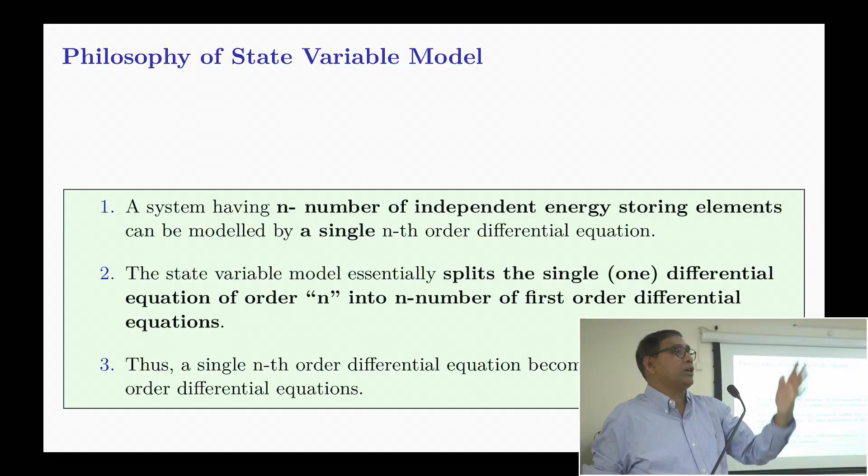A system having n number of independent energy storing elements can be modeled by a single nth order differential equation. So what the state variable model does, it does not use a single nth order differential equation, it splits it. The state variable model essentially represents the nth order system by n number of first order differential equations. So a single nth order differential equation becomes n number of first order differential equations. Now why is that?

Then it becomes easier to solve and do the analysis, because all the equations are first order.

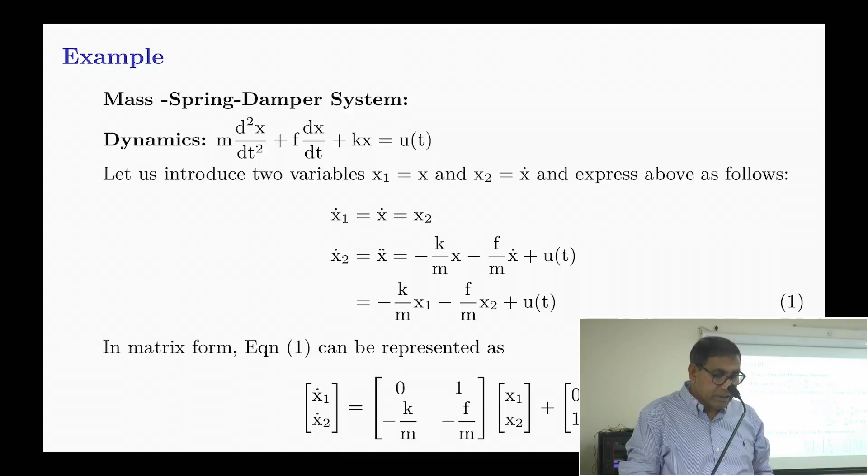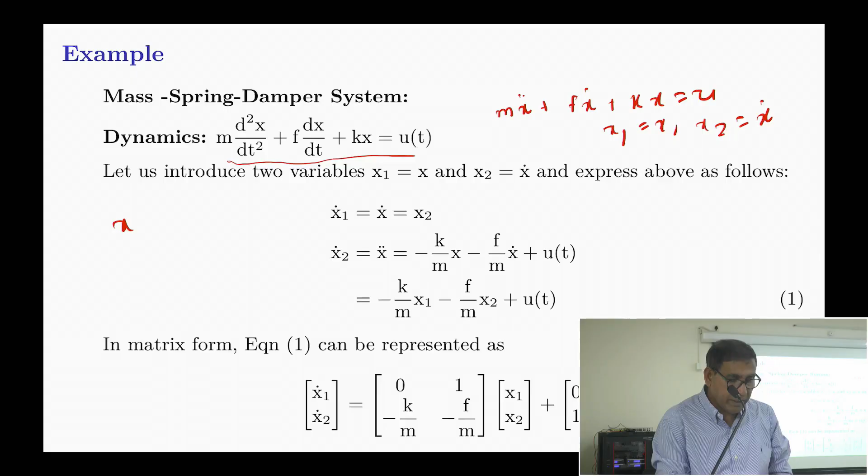Just one example to give you: suppose m x double dot plus f x dot plus k x is equal to u. So if I define x1 is equal to x and x2 is equal to x dot, then the first equation will be x1 dot is equal to x2. And x2 dot, I'm not entering into that because that is equal to x double dot. If you take it to the other side, you will find this is the case.

And this system is now represented by x dot is equal to Ax plus Bu, and y is equal to Cx. So instead of a single higher order differential equation, you can split it into only first order differential equations.

I assume that you know state space model. All the analysis and controller design which is made by this state space model is called modern control. X dot is equal to Ax plus Bu and y is equal to Cx plus Du. One is the dynamic equation, the other is the algebraic equation. Y is equal to Cx plus Du is the algebraic equation.

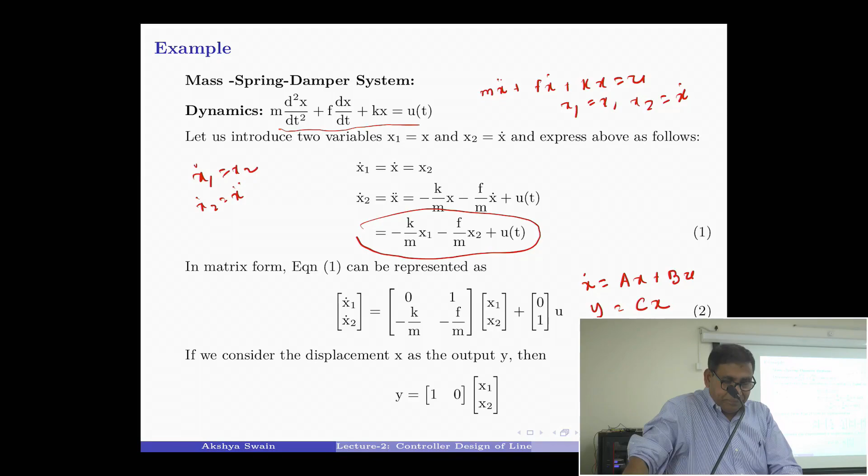This is the point, I will take a little more time. I will tell you, if we answer this question, our understanding about control engineering will be around 70% clear. Just this simple question: is it necessary to use a controller, to design a controller? People say we have to design a controller, right? Is it necessary? Is it a mathematical gymnastics that we will design a controller?

When we were doing PhD in England, in the postgraduate office, there were 2-3 pages of writings every week. Why should you do a PhD? Once it came up.

When I was doing PhD in 1994, one thing is, if you do a PhD, people will think you are intelligent, although you are a bloody idiot. You have no brain, but you are doing PhD. You know what is the meaning of PhD? I am telling you, it is recorded, that's fine. The people listening to live streaming will know it, that these are the foreign faculties telling these things.

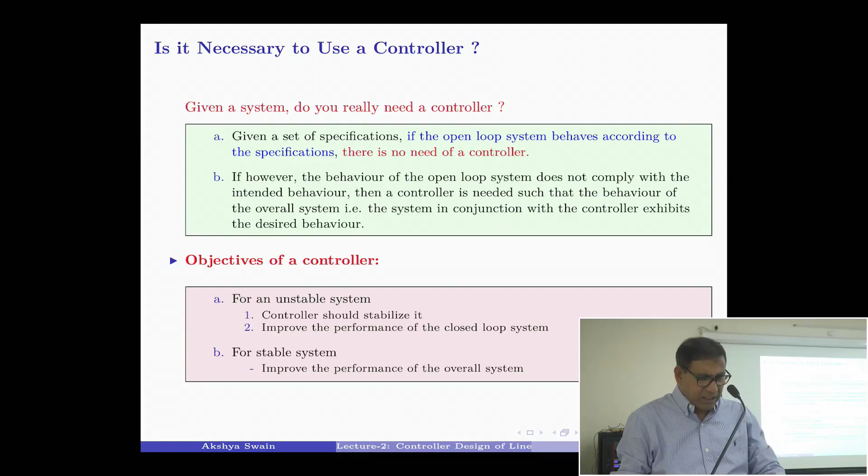We'll see those things written, forget that. This analogy which I am giving: suppose you have a teenage child, and he enters into what we call grammar school, meaning higher secondary school - class 9, 10, 11. Now suppose today your child enters into a grammar school, higher secondary school. The question is, will you employ a tutor from today?

You tell me, let us answer it very carefully. Understand the question first: you have a son or daughter, and she got or he got admitted into the school. Today, will you employ a tutor to come to your house and teach your child? Certainly not, you are not that fool. Clear? You are not that fool, because once a tutor comes to your house, you have to pay money.

Now consider the example of a student studying in grammar school, meaning the higher secondary school. Assume that the student has opted for the following courses: physics, chemistry, mathematics, and English.

Now what will you do? You will not employ a tutor. You will wait till the first term examination, school examination, is over. After 2 months, there will be a school test. Suppose he has taken these 4 subjects. Now assume this is the percentage: he has got physics 90%, chemistry 85%, mathematics 95%, English 70%.

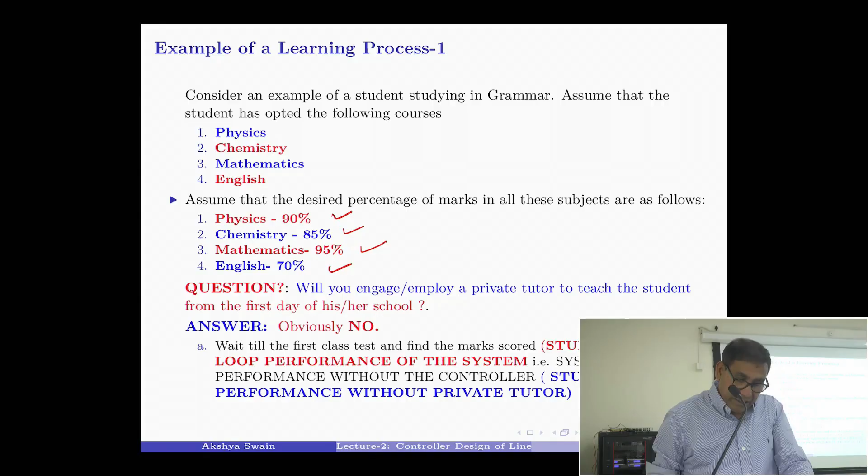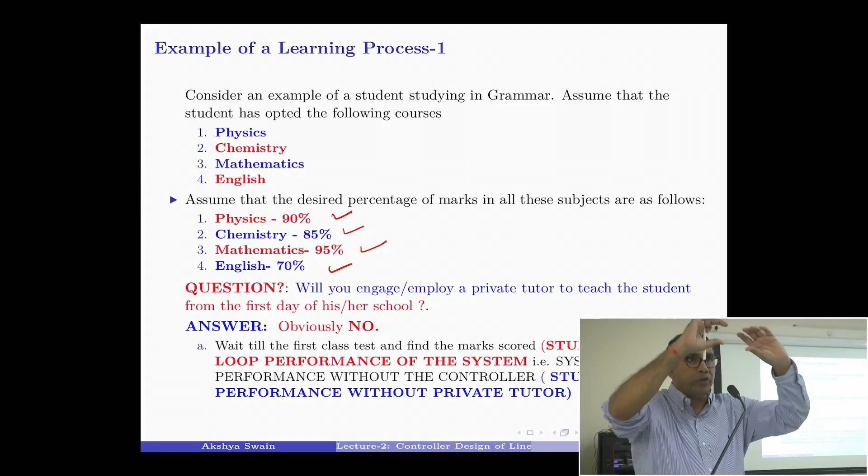Will you engage a private tutor? No, because they have almost the desired performance. Wait till the first test to study the open loop performance - that is, study the performance of the system without the controller. That is the open loop performance of the system, right? Student performance without a private tutor - you first do that. Now let us see, interesting things are coming up.

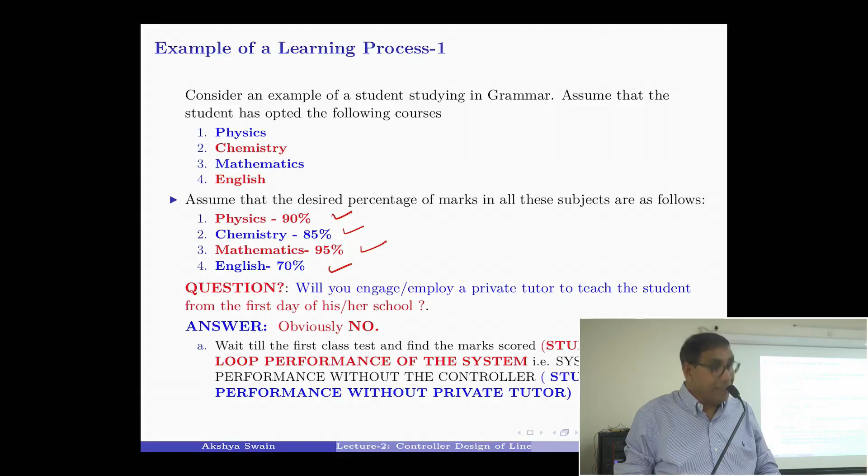Now suppose after the first test, this is the performance - the open loop performance of the students, the marks obtained without a tutor. Tutor is the controller, we'll see. After the first test, the marks are as follows: physics 87%, chemistry 78%, mathematics 94%, English 10%. What will you do? There is no other way out. You have to employ a private tutor, yes or no? You have to employ a tutor. Controller is a must, right?

Then again the problem comes. So I need a tutor, otherwise you will not get your dinner at home, your wife will beat you - what the hell are you doing, your child is scoring 10% and you are thinking he will become a Shakespeare? Now 10% in English, horrible performance, there is no other way out. What should I do? I have to employ a private tutor, right? Should I go outside this NIT campus and stand on the road holding my hand up saying my son has got 10% in English? Will anybody be interested to come and teach my son? Should I do that?

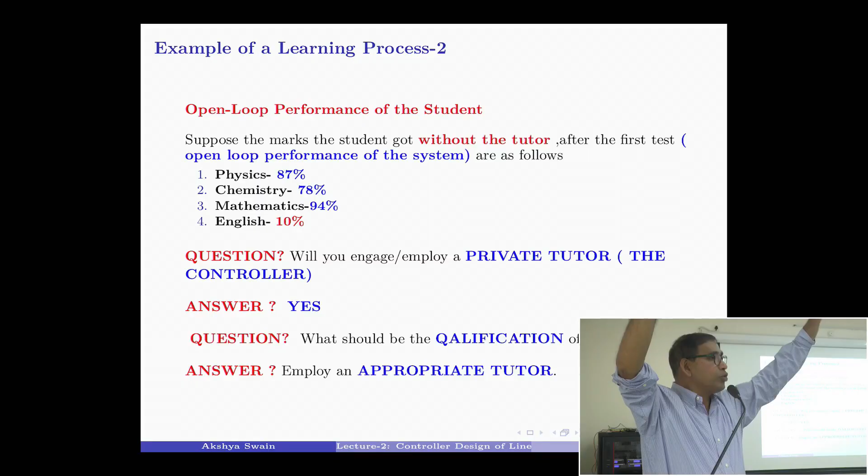If I do like this, many people driving by will stop there - okay, I am unemployed, I will come to your house, because they will get money. Yes or no, should I do it? Should I go to the Panjim railway station and ask - so many people are coming out of the train, my son is doing 10% in English, is anybody coming? Should I do that? So what must I employ? An appropriate tutor.

Appropriate, not any controller. There are many types of controllers.

Who is the appropriate tutor here? Either an English graduate, or if I am in academics, I will go to the English department, Faculty of Humanities. I will talk to the English HOD and ask, do you have any PhD students who are interested to teach? So he will say, okay, I have a couple of PhD students, I will ask them.

So you get an appropriate tutor, right? Those people who have got knowledge of English, that is called the appropriate controller. Employ an appropriate tutor, in this case, an English graduate at least, minimum English graduate.

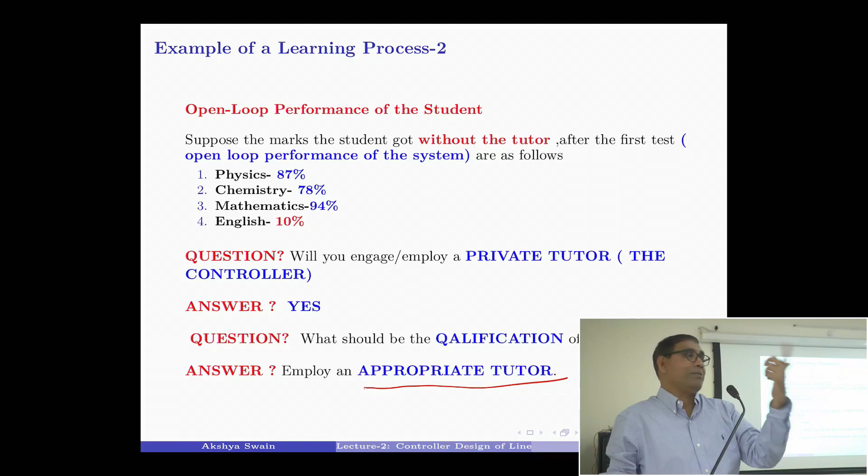Everything is fine, right? Now the next question is a very interesting question. Second test comes. First test is the performance, by second test there is a tutor coming to your house, teaching there, right?

Suppose we engage an appropriate tutor to teach the student. Are we sure that the performance of the student will improve in the next test? That is the important point. Can you guarantee?

Can you guarantee that the performance of the student, your child, will improve? Everything is perfect now. Tutor is perfect, very nice person, English graduate, even an English gold medalist coming to teach.

I will tell you, this is the universal truth. What is the universal truth? There is some universal truth. Universal gate, NAND gate, NOR gate. Correct me, Professor Vida Kumar, I have no knowledge of electronics now. NAND gate, NOR gate, right? Universal truth. There is another universal truth.

All the married people know it. Two people in the entire cosmos, if there is multiple universe according to string theory, that is truth. Two people in the entire cosmos always think that you are not useless, you are bloody useless. Who are they? One is your wife, another is your child.

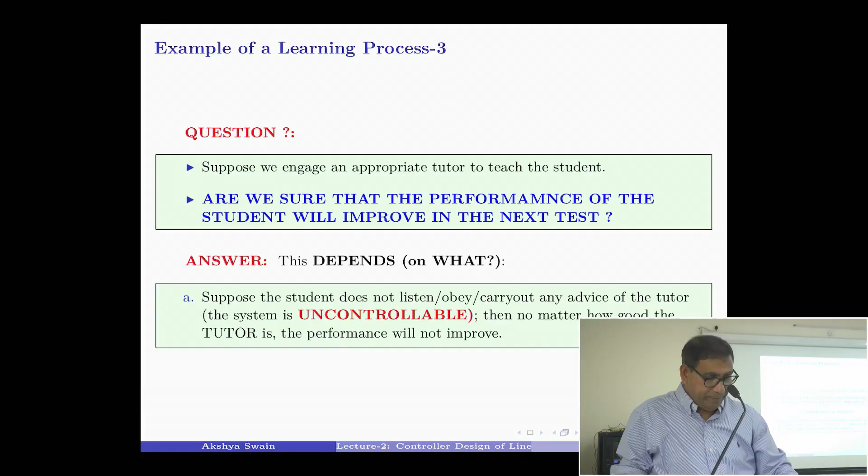Clear? So don't design the controller just because you are intelligent. It is not an intellectual gymnastics. There are so many steps. More complications are coming, just wait. System is uncontrollable.

So before employing the private tutor, the controller should check whether the student is willing to listen to the tutor. That is, test the controllability property of the system. And if the system is controllable, then employ an appropriate tutor.

These things have not been mentioned in many of the textbooks. Controllability. What is the meaning of controllability? Let us understand very clearly.

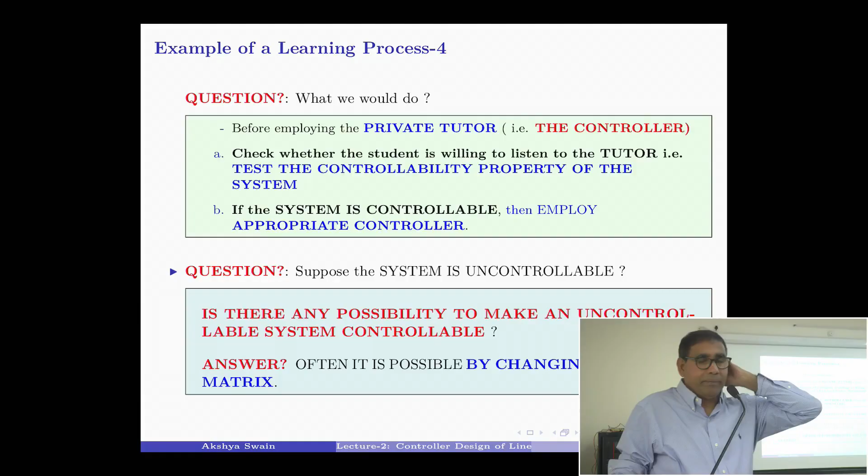I will tell this boy or the gentleman, please bring me a cup of tea, and he obeys my command, then he is controllable. Please do this job, and he does it, he is controllable, right? Take me to Panjim to see the sightseeing, he is going with me, he is controllable, right?

And if I ask him, please bring me a cup of coffee, suppose he says, am I your servant? Why the hell should I go? Uncontrollable, yes or no? Then I will say he is uncontrollable, right? That is not the correct thing.

That is not correct. So whether he is controllable or uncontrollable, controllability is not an intrinsic property of the system itself.

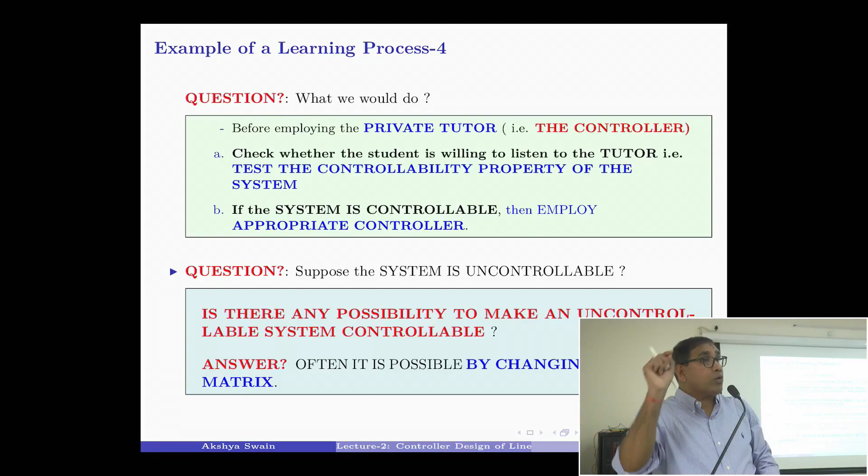Now, I will ask him, please let us go to Goa to see a movie, and he is not obeying my command. Uncontrollable. But his girlfriend comes and says, let's go today to the beach. Oh, let's go. How is it possible? The same person, when I tell him to go to the beach, he says I will not go. But his girlfriend says let's go. He is going, yes or no? So how can you say he is not controllable? So controllability depends not only on the system, but on the person who is giving the input.

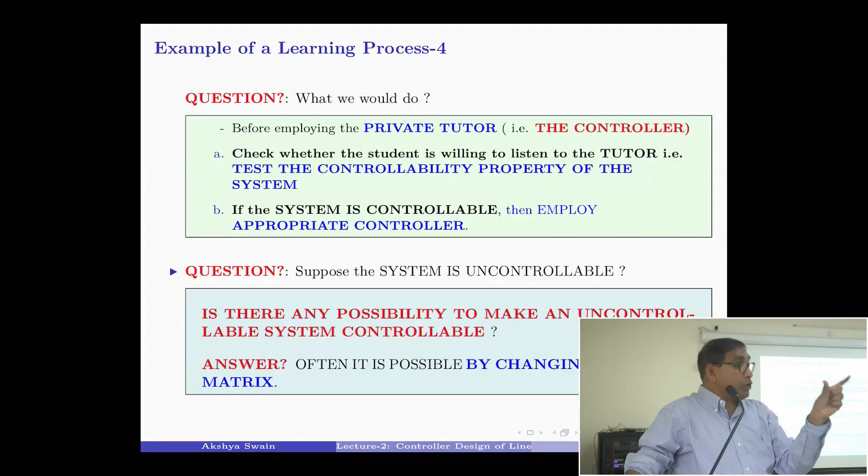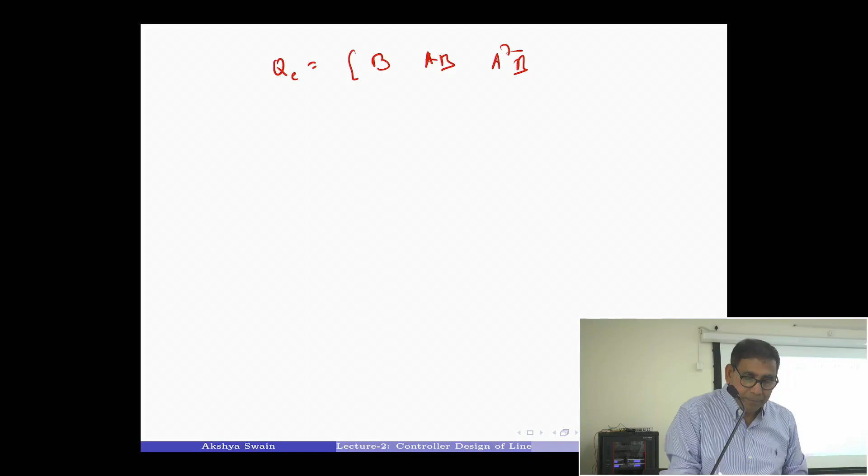The system is x dot equals Ax plus Bu. A is the system matrix, that is the property of the system. B is the input matrix. Who is telling it? So if you see mathematically, the controllability of the system, I am showing the mathematics: B, AB, A square B. You see these things, you should have full rank. So the B matrix, who is telling? Who is telling?

My son, he will not take some of the dishes my wife makes. But I've got a friend whose wife is very strict. She will tell him, you have to take these things, there is no other way out. System is uncontrollable at home, controllable at that place. Got the point? Input matrix, who is telling? Suppose your colleague says something to do, you will not do it. But a director says it, you will do it. So controllability is not an intrinsic property of the system itself.

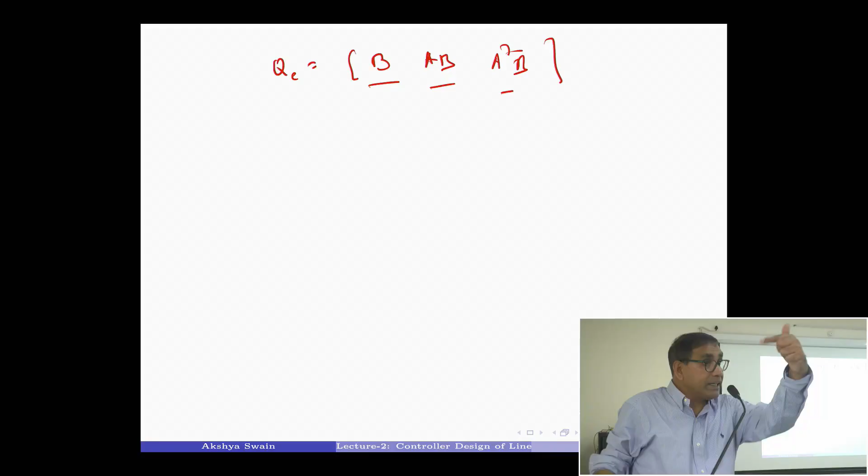It depends on the input matrix. What is the meaning? That means if the system is not controllable, you change the signal which is coming, change the different places where you place the actuators, you get different signals to make the system controllable, right?

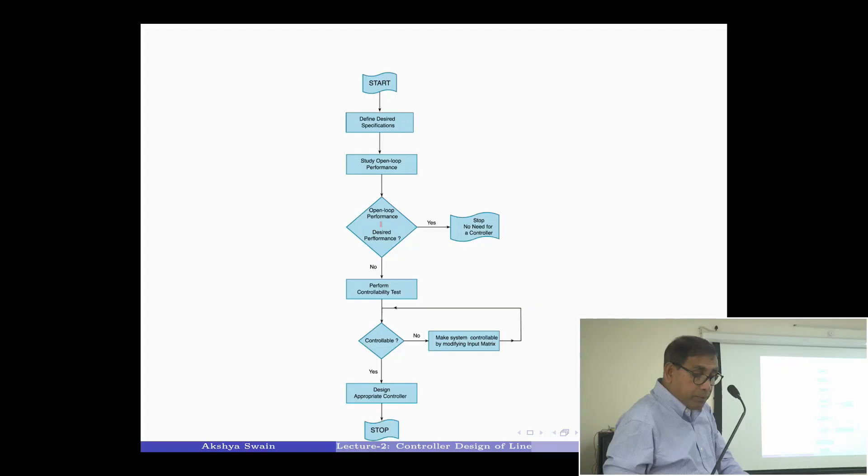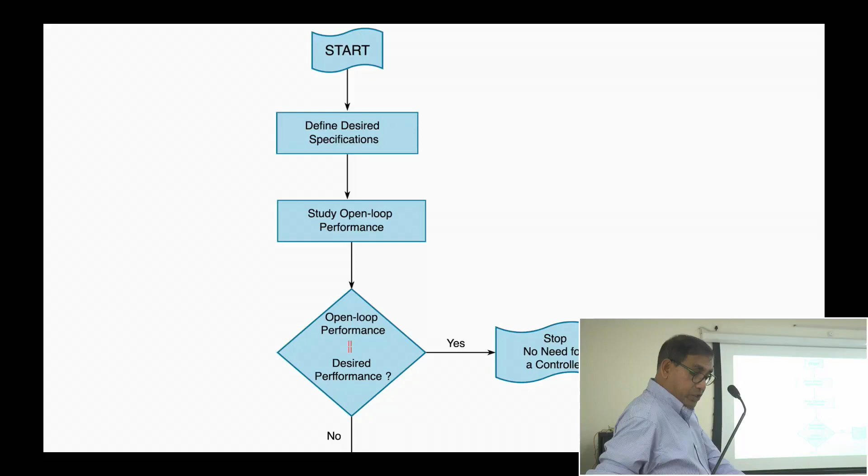So before designing a controller, is it visible? Okay, this is from my book, I have put it here. I'm just going line by line. Start. Define desired specifications. Study the open loop performance. Is open loop performance equal to desired performance?

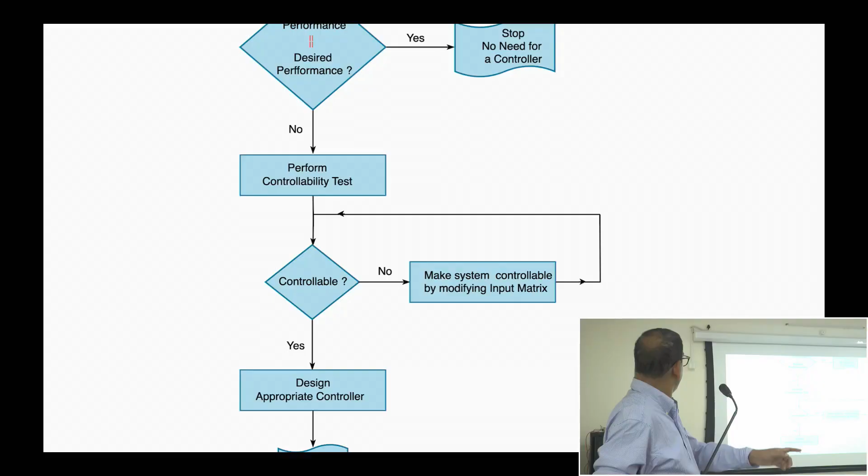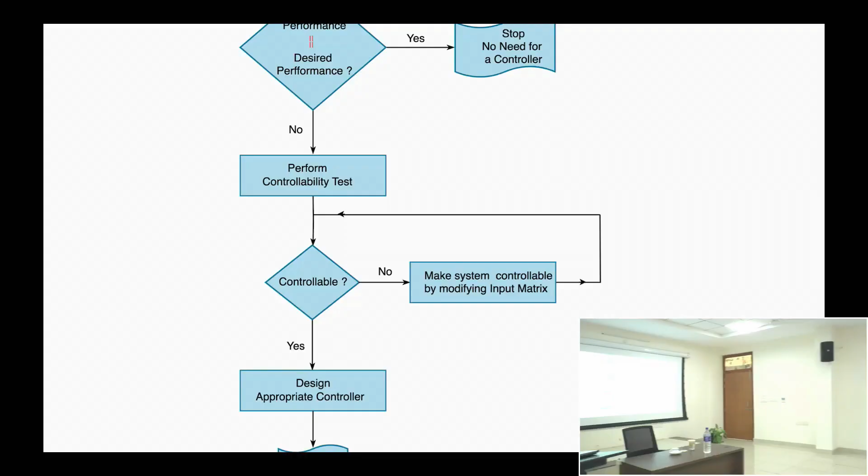Yes, stop, no need for controller. If it is no, perform controllability test. Controllable? Yes, design appropriate controller. No, make the system controllable by modifying the input matrix and then do it. So these are the steps.

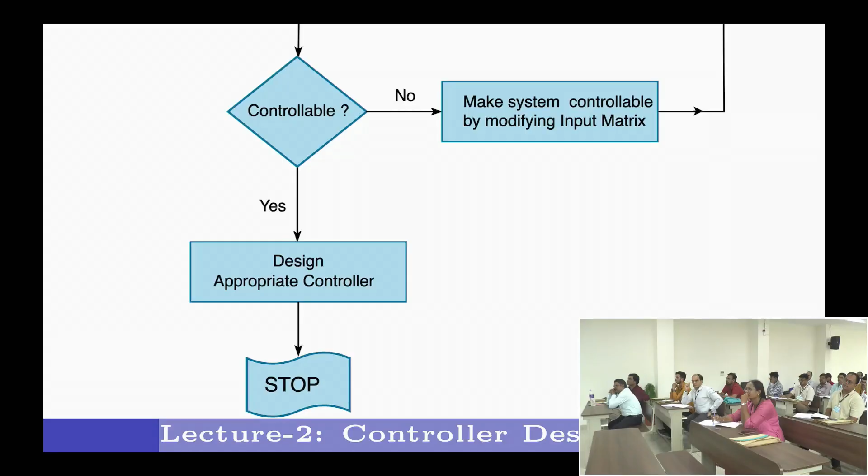And this procedure has to be followed no matter which type of controller you are designing. But one thing I must tell you, you must be very careful.

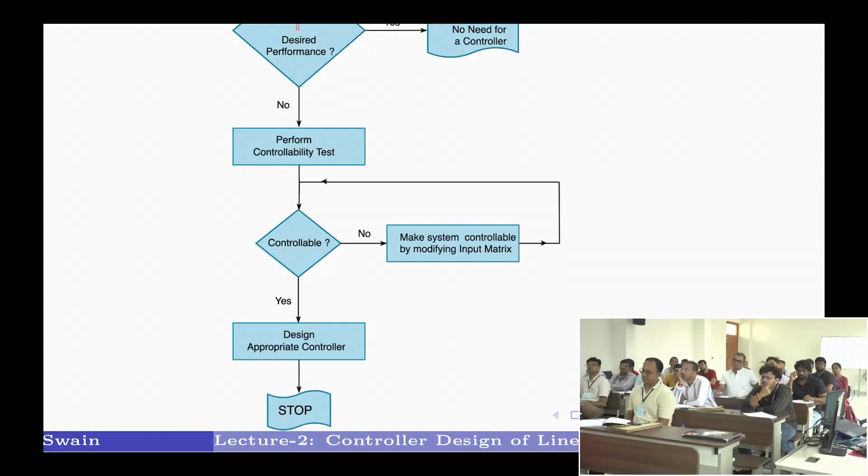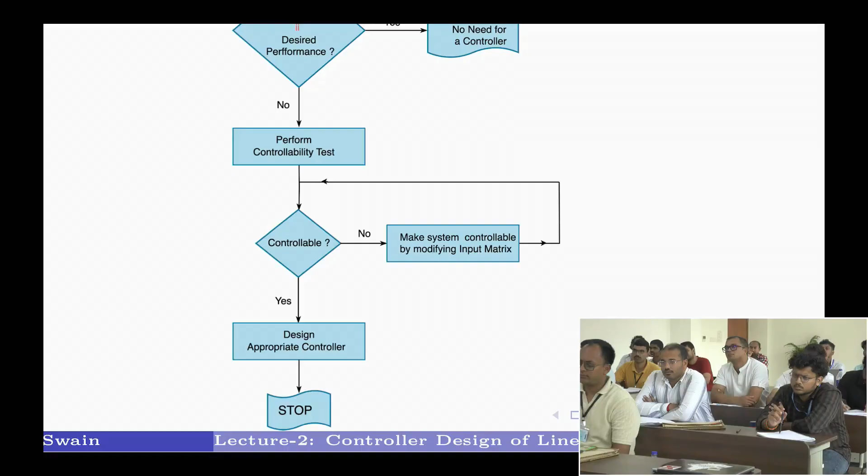Controller is an outside element. Understand the analogy? Controller is an outside element, he is coming to your house, he is entering into your house. Remember, state variable means you are entering into the house, not like transfer function where you are standing outside the house. Transfer function is the outside external description. State space model is the internal description. Transfer function we will discuss tomorrow while talking about modeling, because now you know you are entering into the house, you know everything in the house.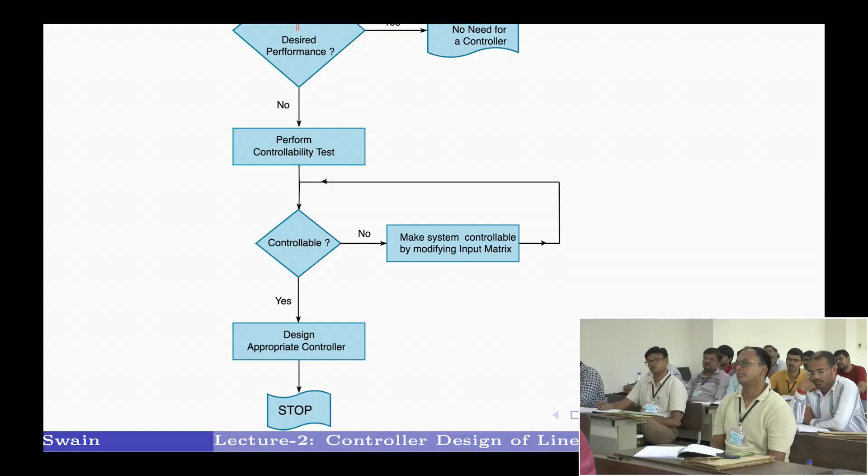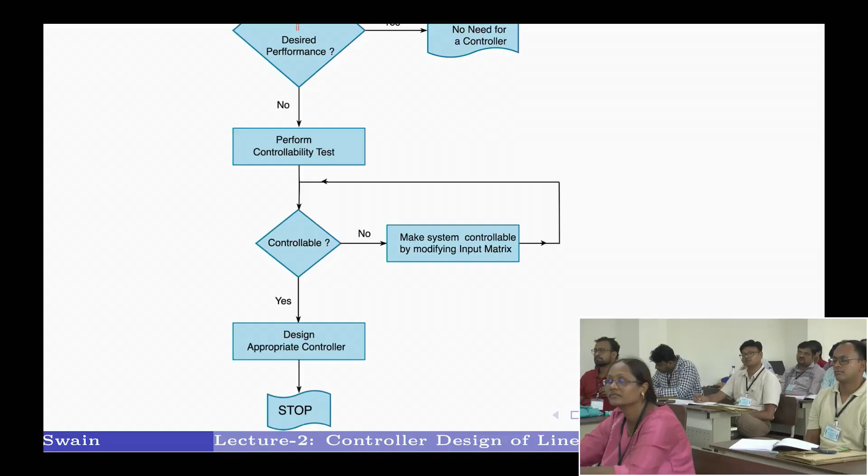Suppose that tutor is a young fellow, something happens in the house because you have other members also. So instead of improving it, it will deteriorate the performance, it will make the system unstable. Got my point? So you must be very careful while employing a controller, right?

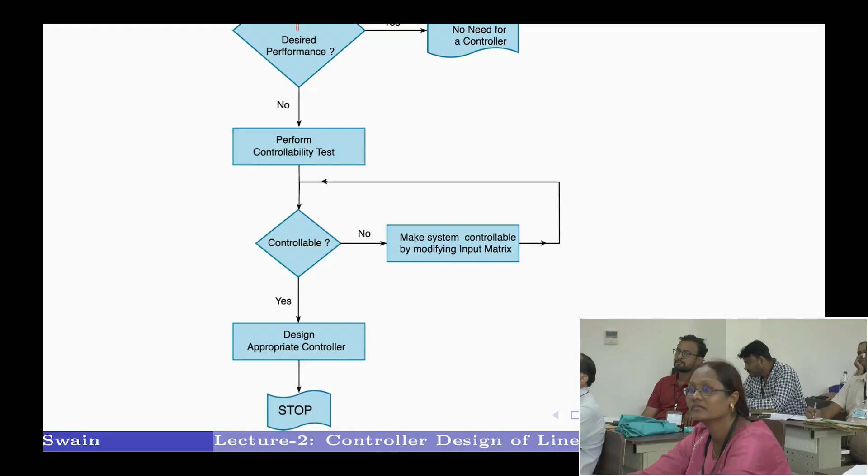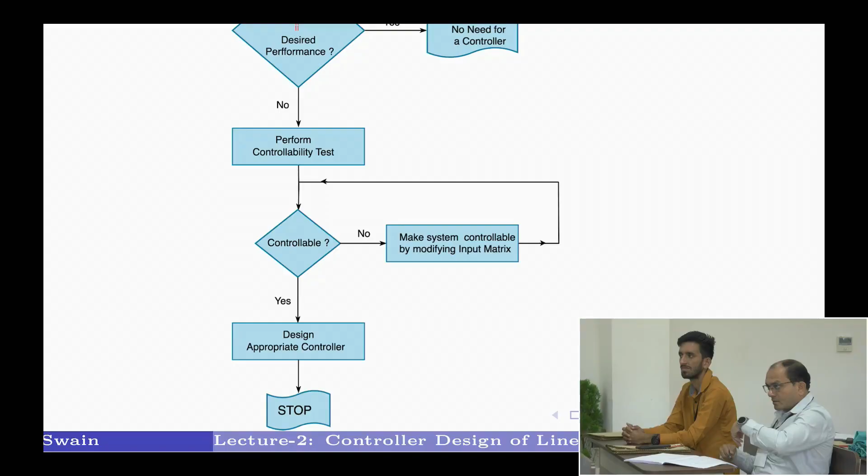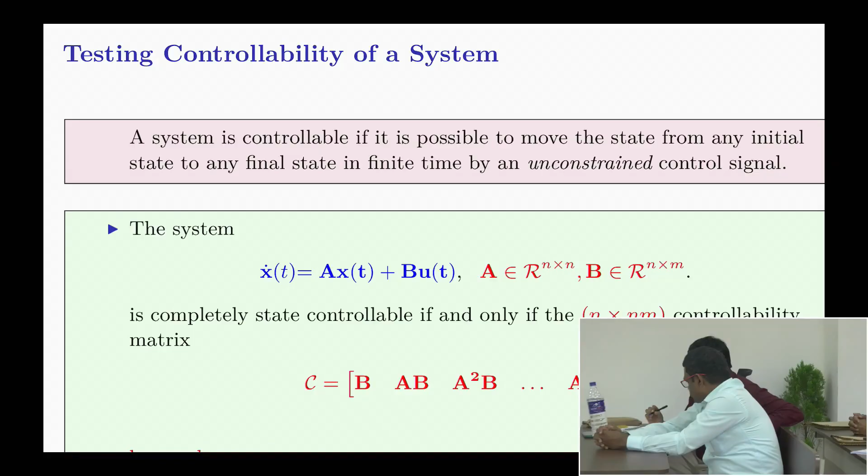So controllability test is a must, but while doing the controllability test, be careful, it is a property of the system. If it is not controllable, change the input matrix and design the control. This is the standard thing, testing controllability: system is controllable if it's possible to move the state from any initial state to any final state.

I assume that none of you are teaching a control course. How many of you have actually studied a control course before, while you were a student? When you become staff, then you say that the control people are useless, will not teach or will not write. No, that's understood, there is no need of telling it.

Now I'll make very interesting things here—or rather, I'll make things which may be interesting for you.

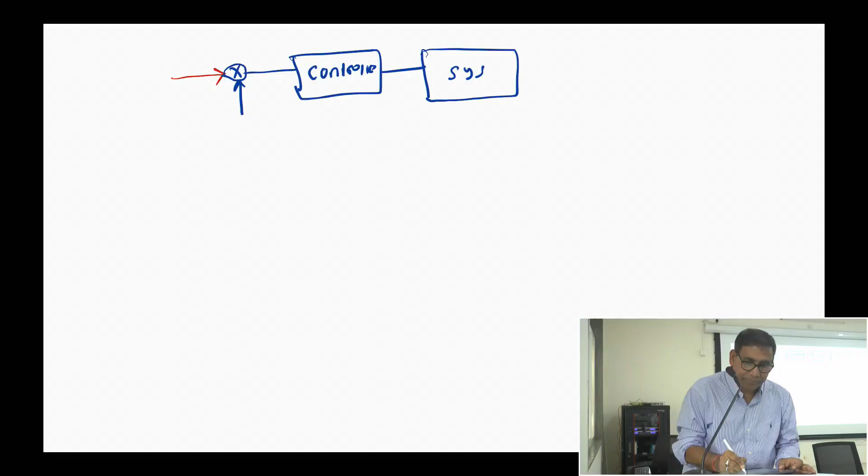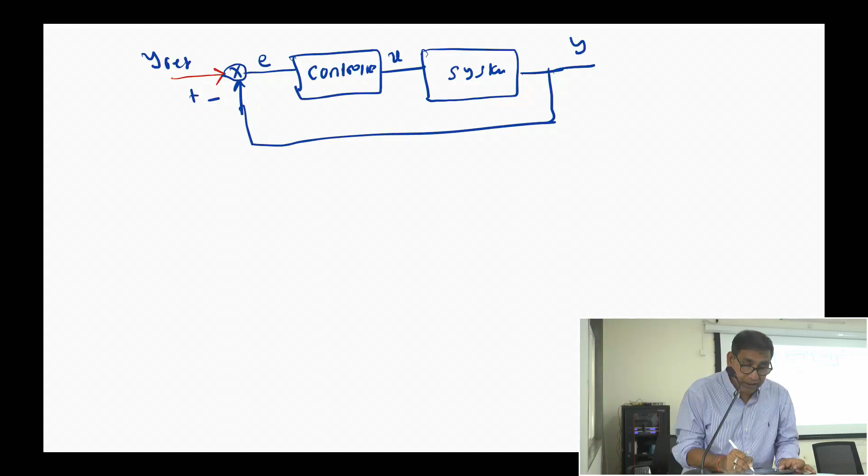This is the controller, you will get used to my handwriting by tomorrow. This is the system, and this is output Y, this is Y reference. Plus, minus, this is the error, and this is the command signal. We said command signal, UC, going to the system. Understand it very carefully, okay?

These type of control systems are called output feedback control systems. Why are they called that? Because the output is fed back to the input. You compare it, error is there, then the output of the controller is the command signal, right?

If in future you study control engineering, you ask the students like this: Y reference is equal to Y, this is the error, right? You want this error to be 0, yes or no? Then the moment the error becomes 0, the error going to the controller means UC becomes 0, then output becomes 0. You got my point?

Just think of these things, it is a confusing thing actually. No book has given this type of concept. Understand the question first—you are comparing, you want the error to be 0, and the output should be equal to reference. But the error becoming 0 means the output will be 0.

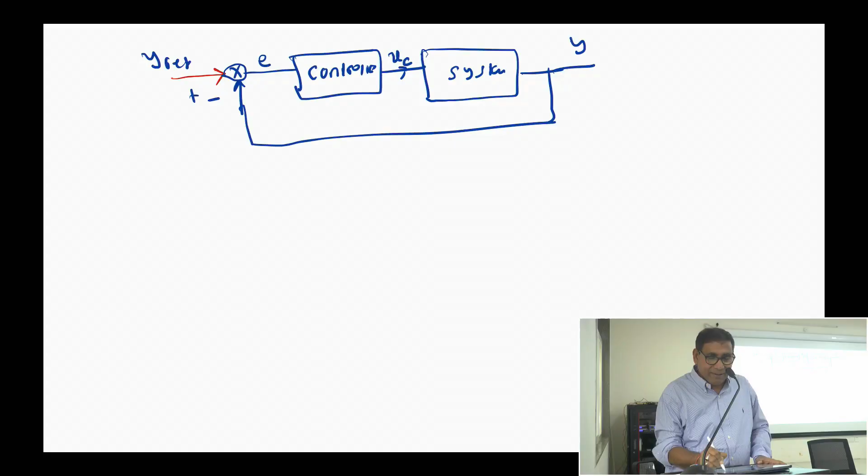So what is that? I'm using so many words to explain it. Remember, I'm just giving a diagram here. This is the error, and this is UC. UC is here, you see, this point, one case—some constant. You see, the error may be 0, but the command signal is not 0. See the diagram I'm showing here, so that command signal is not 0. Always remember, if the command signal becomes 0, then everything will be 0, right? Anyhow, so this is the output feedback control system.

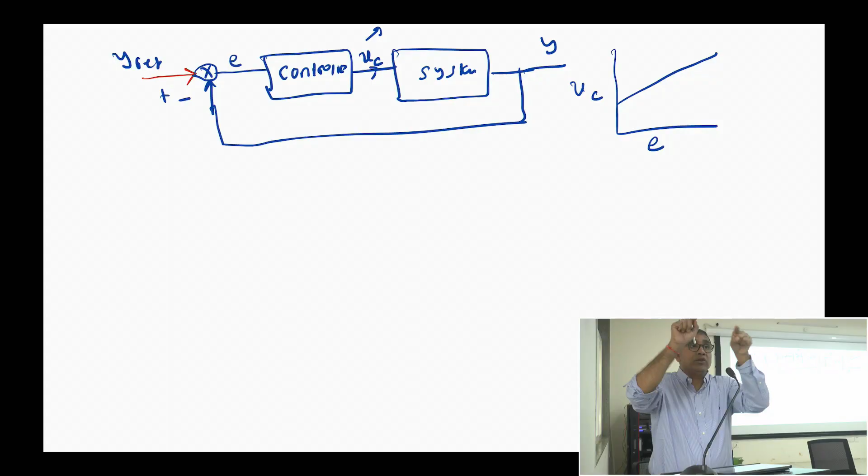Classical control design is essentially output feedback—you take the output feedback, get the error, design the controller. In the state variable model, you enter into the system and know each variable of the system, so we use all the state variables as feedback. So in this state variable model, the control signal UC is equal to minus some gain k1 into x1 plus k2 into x2 plus k3 into x3. You see, like this, state feedback, okay?

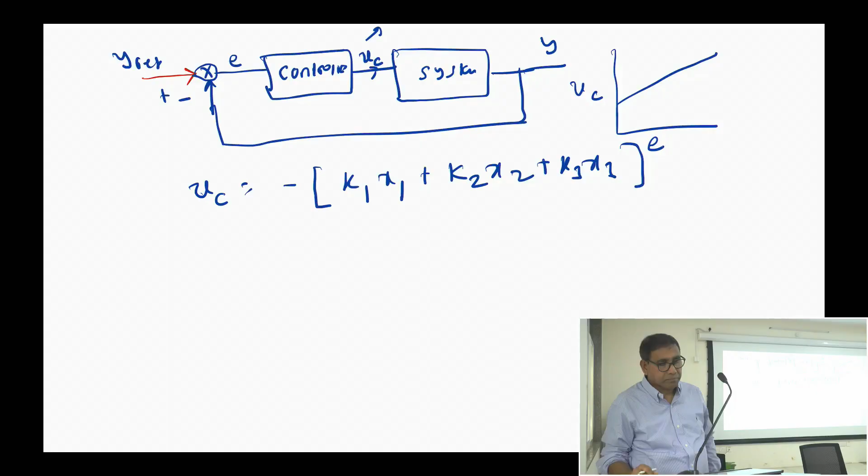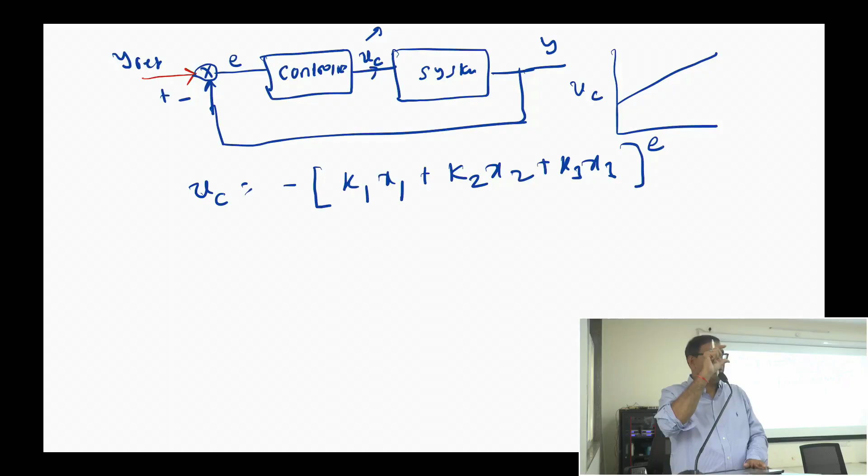If I am teaching control theory, I will tell you one thing—only one or two mathematics tricks you need to know. I always tell students 3-4 mathematical tricks. The first thing, just to show their interest, this is what I do in the class, in the first control course.

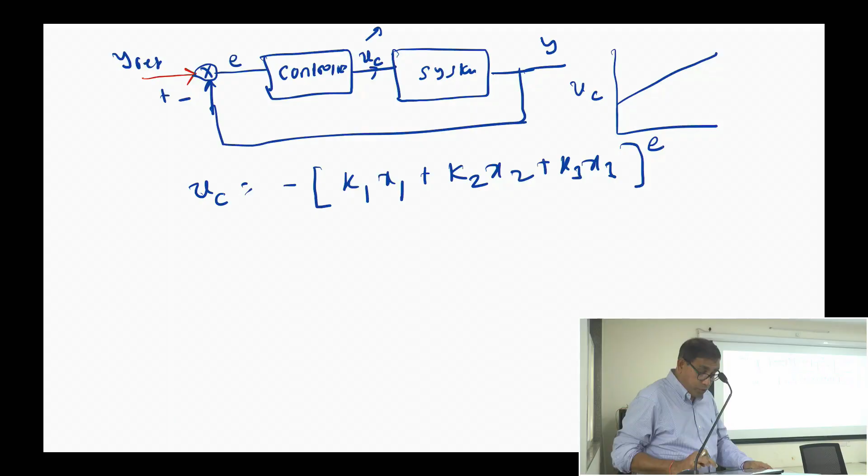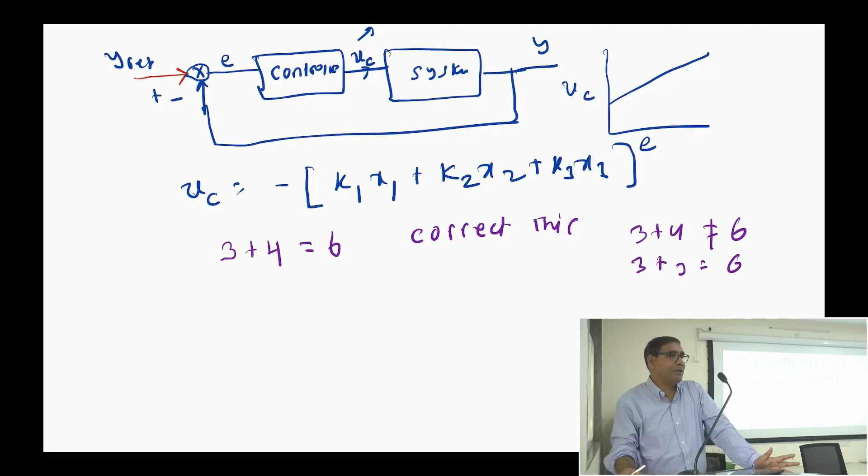3 plus 4 is equal to 6. The question is, correct this. Can anybody correct it? Tell me. 3 plus 4 is not equal to 6—okay, one answer. Any other answer? 3 plus 3 is equal to 6. That is also correct. How many answers are there? Infinite. Okay, I did not put any restriction, right?

I did not put any restriction. If I put a restriction—without changing any numbers on the left-hand side of the expression, without changing the mathematical symbol—you correct it, then you will change the 6 to 7. Clear? So if a problem has 10 possible solutions, putting 9 restrictions, 9 constraints, we will get a unique solution, right? The theorem says that.

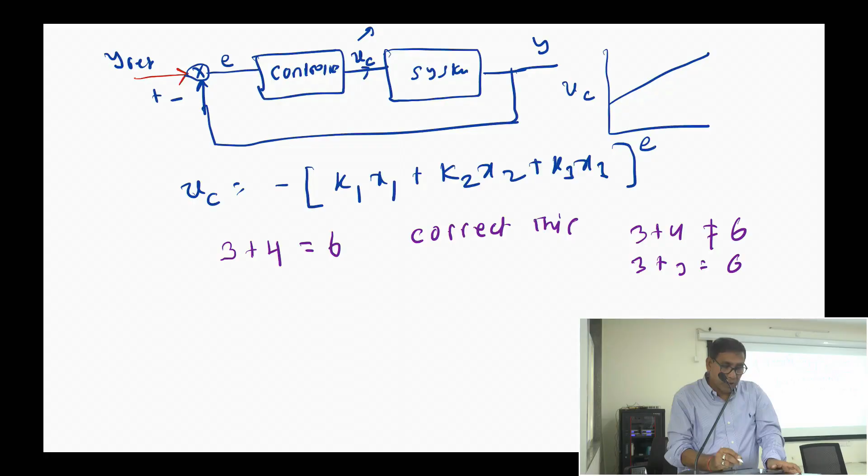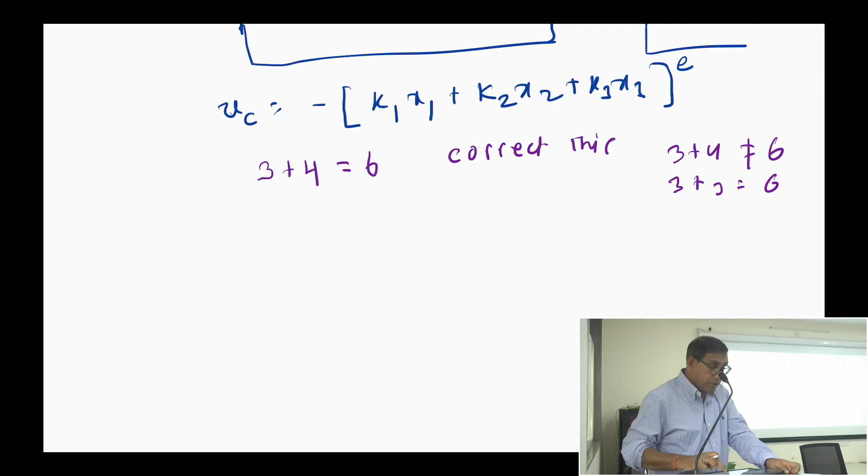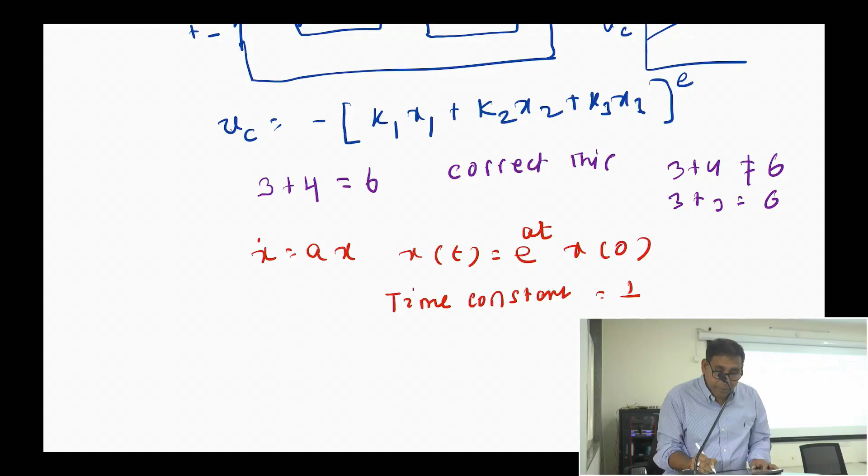That's one thing. Then another important point: if x dot is equal to ax, then x(t) is equal to e to the power at into x0. What is the time constant of this mode? The time constant—only this, if students understand it—time constant is equal to 1 by a. This is e to the power at, meaning time constant is 1 by a. That's the only thing you need to understand, 1 by a.

So if a system has a pole at minus 10, then x(t) will be equal to e to the power minus 10t into x0. What is the time constant here, lambda 1? 1 by 10, that is equal to 0.1, right? Now suppose minus 100, what is x(t)? E to the power minus 100t. What is the time constant? 0.01, right?

There is a term called engineering infinity. What is it called? Engineering infinity.

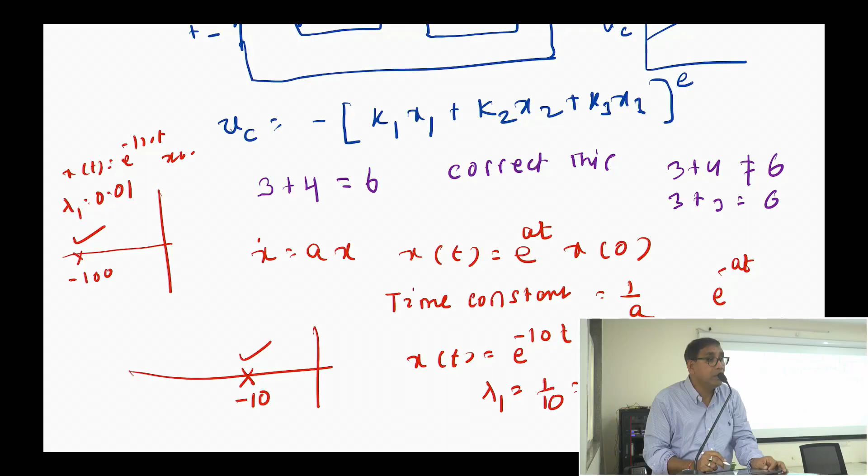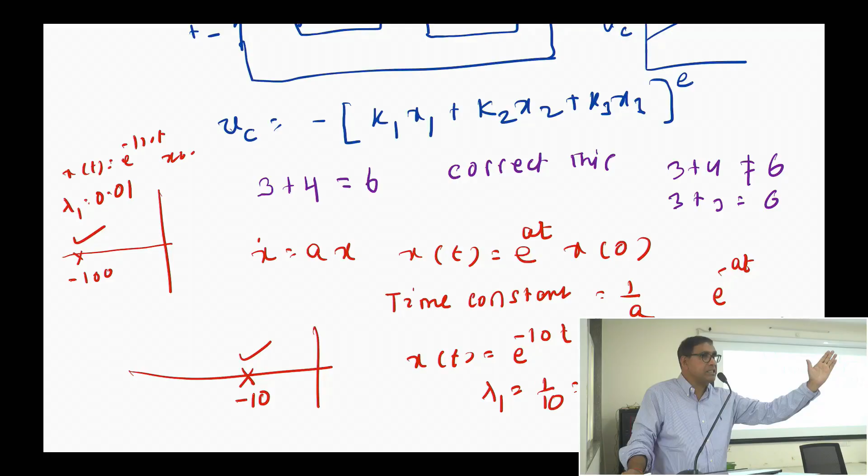Now, is this fast or is this one fast? Which one is fast? 100 is fast, right? So if the poles are away from the j omega axis, why am I telling this thing, I will tell you. Poles are away from the j omega axis, the system becomes fast. Closer to the j omega axis, system is slow. Right? Clear?

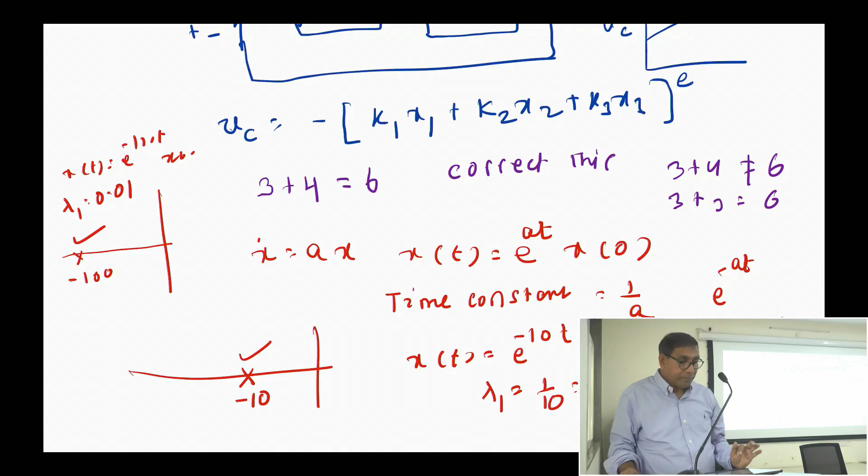Now, I want... there is a powerful controller. So now we know the location of the poles decides whether the system will be faster or slower.

Suppose this is the j omega axis. If you are closer to this place, your response is slow. If you are away from that, response is faster. Right?

The state feedback controller is not output feedback controller. Remember, it's not output feedback.

If the system is controllable, it is possible to place the poles anywhere in the S-plane by suitable selection of the gain matrix. You will do it today in a tutorial by giving the MATLAB command, the place command.

Say, for example, I want you to be very fast. So what will I do? I will ask you to go outside the room and go to the road. Okay, that is far from this place, you will be fast. If I want the system to be slow, then I will tell you to come closer to this place, the j omega axis. If the poles are here, closer to the j omega axis, response becomes slow. Away from the j omega axis, response is faster. So, if the controller can do it, it can place the poles anywhere. Suppose the controller places them anywhere, the system becomes faster. Right?

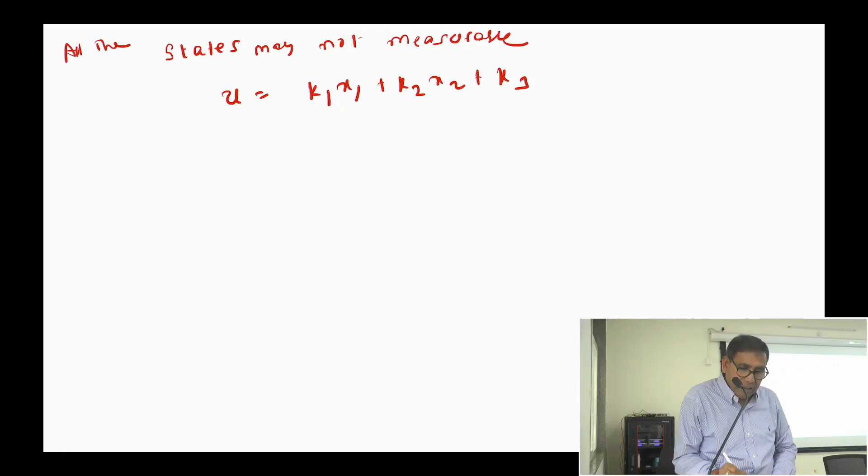You are designing a controller, U equals K1 x1, K2 x2, plus K3 x3. Now suppose out of x1, x2, x3, two states you cannot measure. Then can you do it? What's the point? Because after all, you have to measure it, then multiply by certain gains, right? So what will you do?

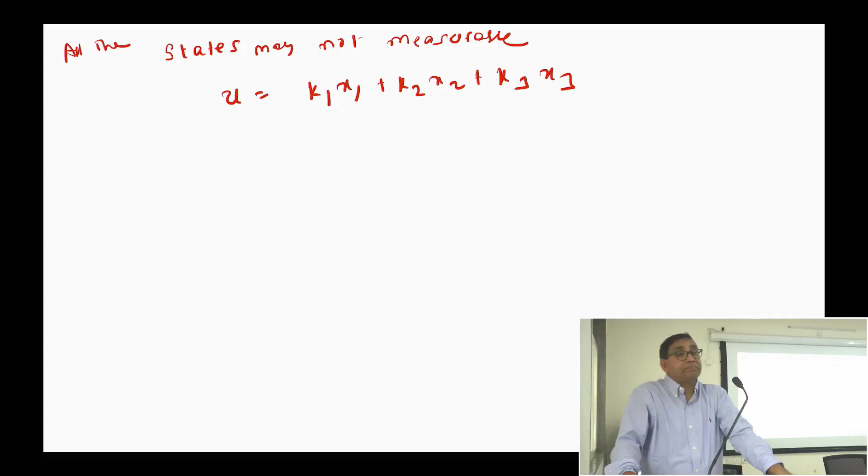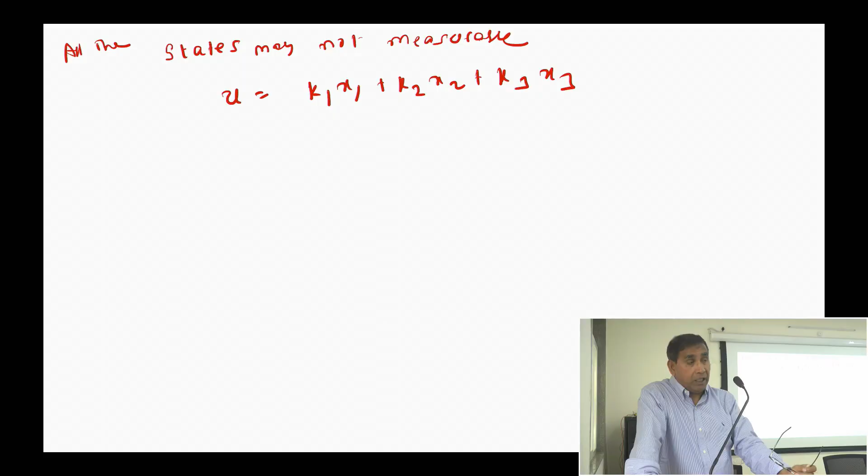If the system is not measurable... the state feedback controller is a powerful controller, no doubt. It can place the eigenvalues anywhere in the state space, right? But it assumes that all the states are measurable. Now, if those states are not measurable, then we have to estimate the states, by using an observer.

We have to estimate the states using an observer. So in that case, U will be equal to K1 x1 cap plus K2 x2 cap plus K3 x3 cap. Cap means estimated value, because you cannot observe it directly.

If some states are measurable, don't estimate them. Suppose x1 is measurable, you only estimate the remaining ones. That's called the reduced order observer.

So, pole placement controller is a powerful controller. That controller can only be designed if the system is controllable, but it has its own problem: where to place the poles? First thing. Now, suppose you are an expert and you know where to place the poles, that's fine.

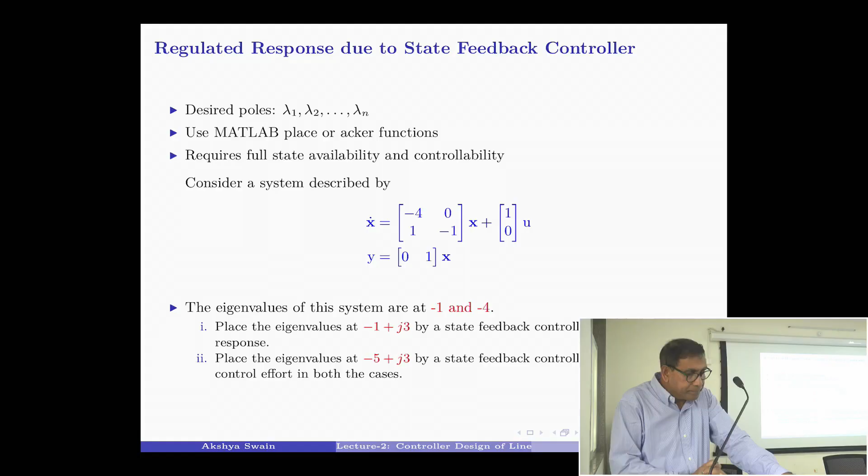Now, common sense. Suppose the open loop system poles are here. I want to place the pole in the back bench. Case number 1, I want to place the poles outside the building. Where will the control effort be more? Outside. Got the point? It's very common sense.

So again I am modifying the theorem now. If the system is controllable, then it is possible to place the eigenvalues anywhere in the state space by the use of an unconstrained control signal. There is no constraint on the control signal. If there is a constraint on the control signal, that the control output should be this much, then it is not possible, right?

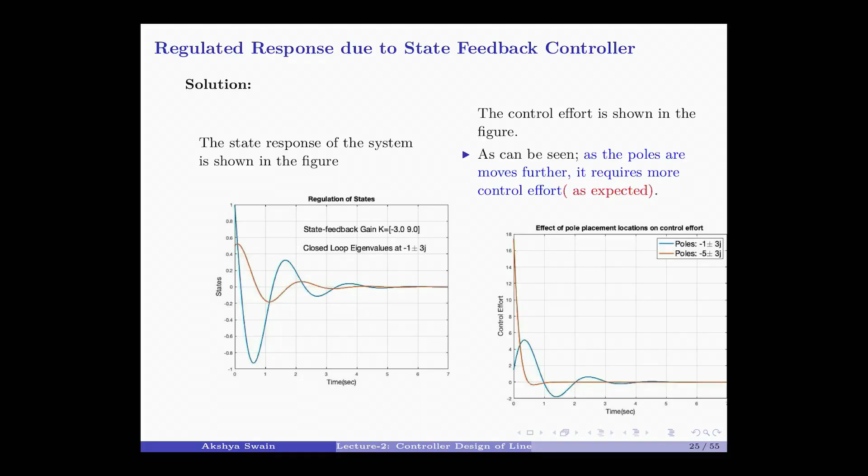Yes, constant. Otherwise, how can you place it, right? Now see in this example here, the eigenvalues are placed at minus 1 plus 3j, and you see the control effort is 5. The eigenvalues are placed at minus 5 plus 3j, the control effort is 18. What a point?

Another important thing I will tell you, because in many places throughout the world you will find people working on power system. We will talk about those things when we discuss Lyapunov stability later on. See the interesting thing, some of the statements I will make here may appear controversial, which is not. There is a nonlinear system. How the power system works, and most engineering systems work, there is a nonlinear system. We will see all those things in nonlinear analysis.

You get the equilibrium point. You get a linear model which is valid if the system is operating within the equilibrium point, in a small region around the equilibrium point. Then you use that model. That model is valid if the system is operating within the small region about the equilibrium point. Use that model to design a controller.

Then in the simulation result, you see the journal articles. Simulation result, sudden short circuit in the transmission line. This is the response.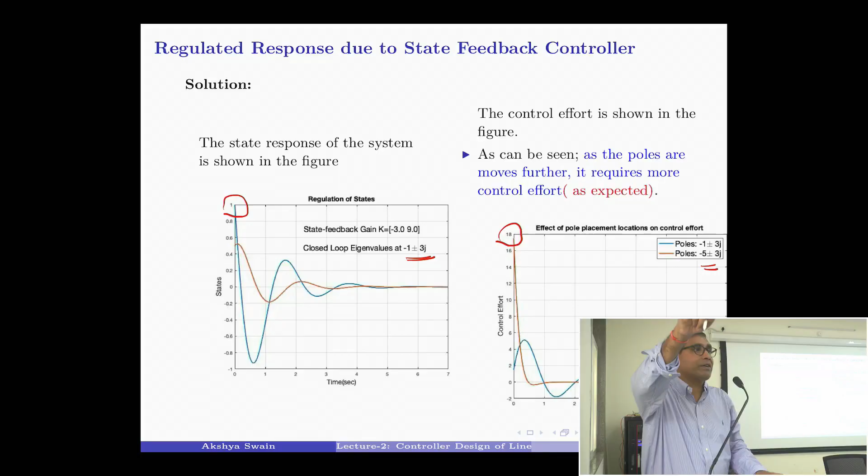It has no value. The fundamental assumption is around the operating point and the small signal disturbance. How is that possible? Then they will argue, they will say, no, we put in the large signal disturbance, this is our result, you cannot say the result is wrong. That is also true. The question is, what is the answer?

I am a sober child. I always obey my parents. I behave perfectly, whether you are coming to my house or not, it doesn't matter. You are coming to my house, I am sober. You live in my house, I am also sober. Your presence in the house doesn't matter to me.

The power system in general is always stable. It behaves nicely. You are designing a controller to get it published in the journal. Power system doesn't require it. It is always stable.

We have got around 12 to 15 students doing PhD. One student is working on multi-agent control for power system, MPC-based sliding mode control. I told him, what the hell are you doing, man? Another, deep learning based, one of my PhD students from Indonesia, Gunawan Dewanto, is doing deep learning based controller. I told Gunawan, one day Gunawan and myself, we laughed. I told Gunawan, you know and I know this is all nonsense.

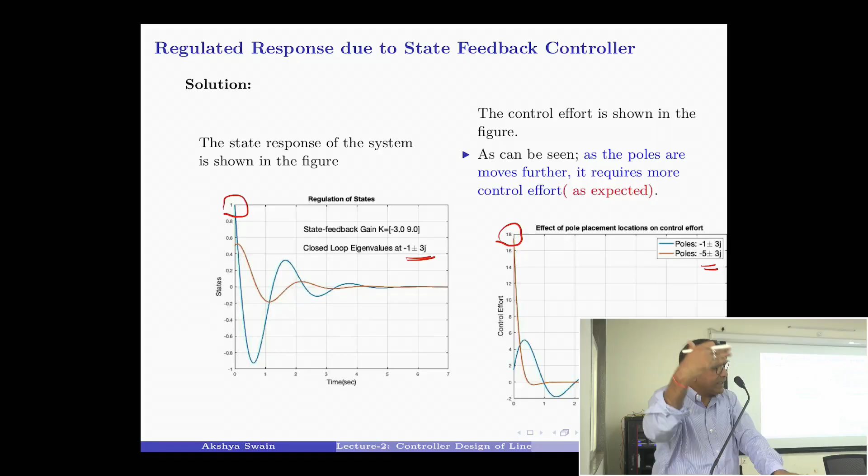For a power system, why do I need deep learning? But we are doing it just to publish a paper, and we are doing it while publishing papers. That is the truth, that's the truth. This is recorded, people should know these things. We are telling people, if you want to understand deep learning, a simple PID controller can do the job. What is the necessity of using a very complex controller?

Is it necessary that the entire power system be completely stable? Power system is already completely stable, there is no point. There might be a little stability issue because of the penetration of renewable energy nowadays, but why do that? Deep learning, machine learning, neural network, reinforcement learning, everybody is doing it, but it's not necessary. A simple PI controller can do the job, simple optimal control can do the job. So you are attending this course also.

Model predictive control, MPC, when it came up, Manfred Morari who did it in 1990, that is essential for chemical plants which are slow. I will also teach you, day after tomorrow, something called self-tuning controller. When it came up, Karl Astrom did it in Sweden, then David Clarke. When I was doing my PhD, David Clarke came to our university to examine a master's thesis, I have seen that guy. And Peter Gawthrop, one of his students, was editor of the International Journal of Control, he also came to the university. Our department is a control department, many people come, those are the people who developed these generalized predictive controllers.

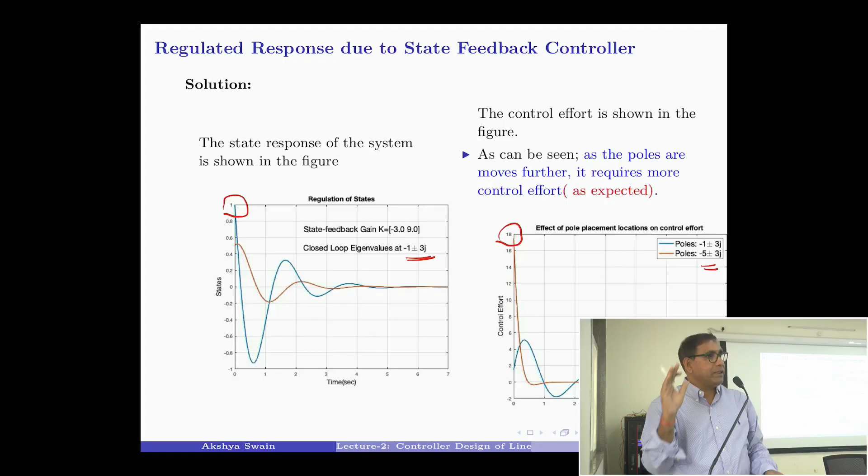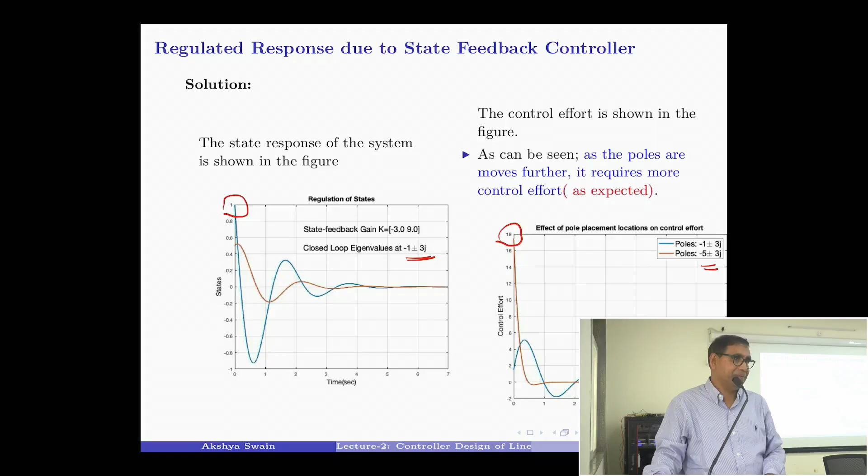What you are studying here, machine learning, neural network, which you will do in this course, that's fine, absolutely fine, no doubt about that. But you must know when a simple PI controller can do the job. Why do this otherwise? Okay, just so, anyhow. So any questions until now?

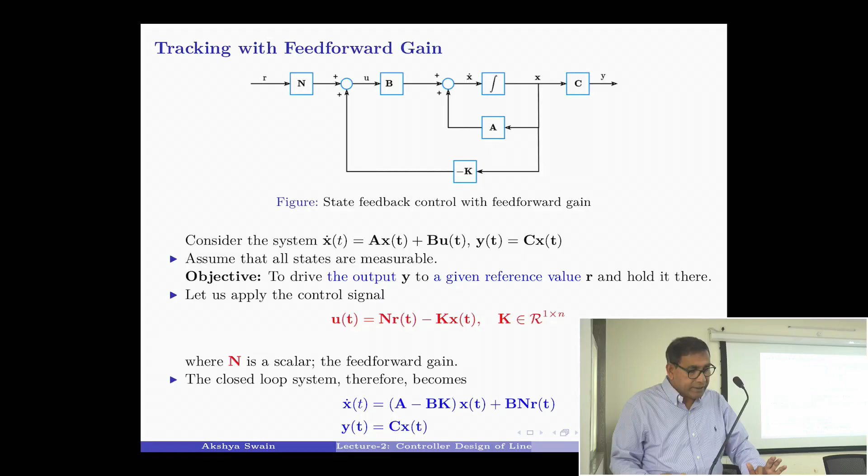A state feedback controller can do anything, anywhere in the state space, by constant control signal. If the states are not measurable, then you design an observer. How much time is there?

5-10 minutes, or 5 minutes? 5 minutes and I will close it. Okay. Oh, no, sorry, please, wait.

Why is it not coming? Yeah, major problems of state feedback control design.

You should estimate the states. You cannot estimate the states for all types of things. Suppose I will cover everything, I am talking here, I will cover everything. Observer means from the output you can observe what the states are. I am giving an analogy so things will be clear.

You go to a particular person's house, okay? You are not allowed to go inside the house, right? Suppose you have a son and you are looking for a girl for his marriage. Then you go and ring the calling bell. The person will come, you ask him, but you are not telling your intention.

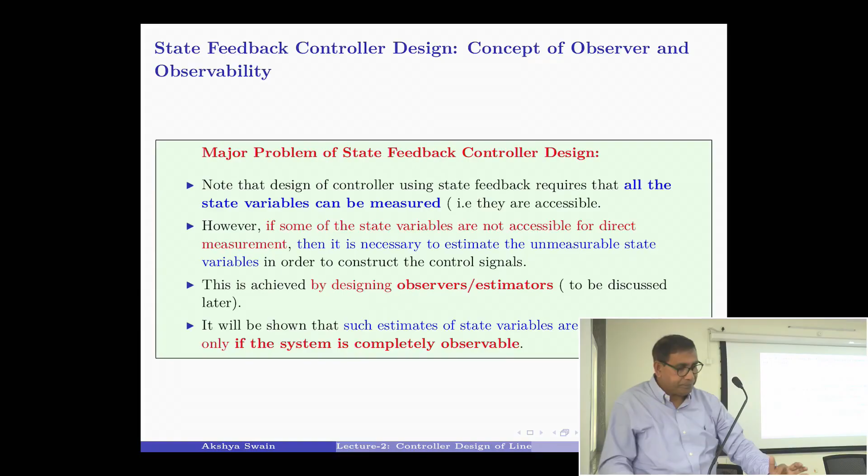Estimate the states. Oh, all these mathematics are there.

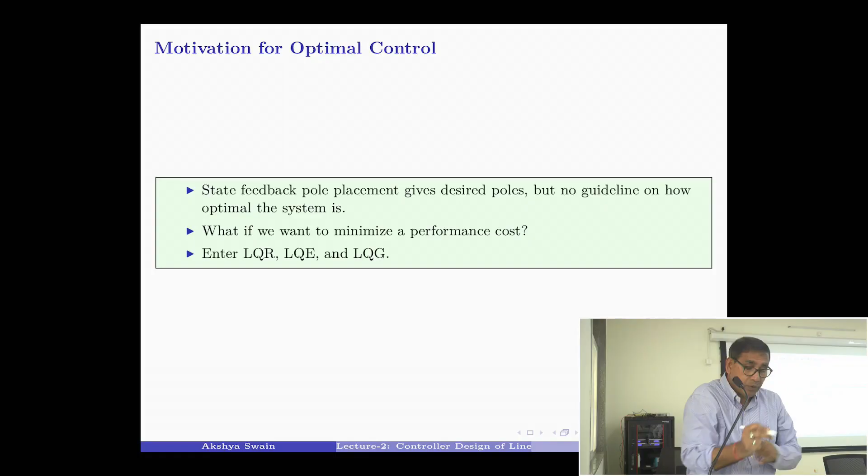There are different types of controllers. We will see, many things we can discuss offline, but I will tell you something here before I close it, within 5 minutes. The most important controller is called the PID controller. I just tell you a little bit.

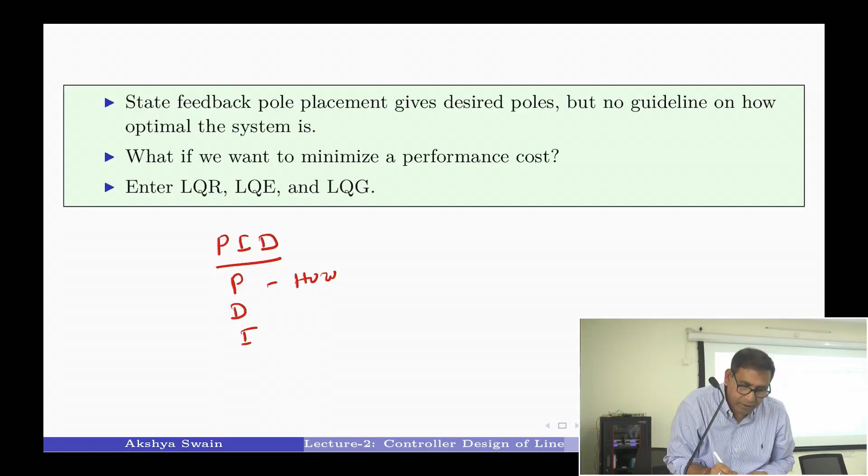Proportional controller, derivative controller, integral controller. It works on how much is the error. P controller - how much is error. This controller works on how the error is changing.

I will give an analogy, then things will be clear. Just a minute. How long the error persists.

Are you getting my handwriting now? After 1 hour? How long the error persists.

Now suppose there is your son. Suppose in mathematics, out of 90, he is scoring 30. So there is a large gap - large gap in the error. How much is the error - so proportional controller will work. You have to change the proportional gain. So instead of 1 hour of mathematics, he should study 3 hours, 4 hours, right?

How the error is changing. One test, he is scoring 90. Another test, he is scoring 10. Another test, he is scoring 80. Another test, he is scoring 50. So you see, it is changing, there is no consistency. Derivative control will take care of that - so if the error is changing, it will work.

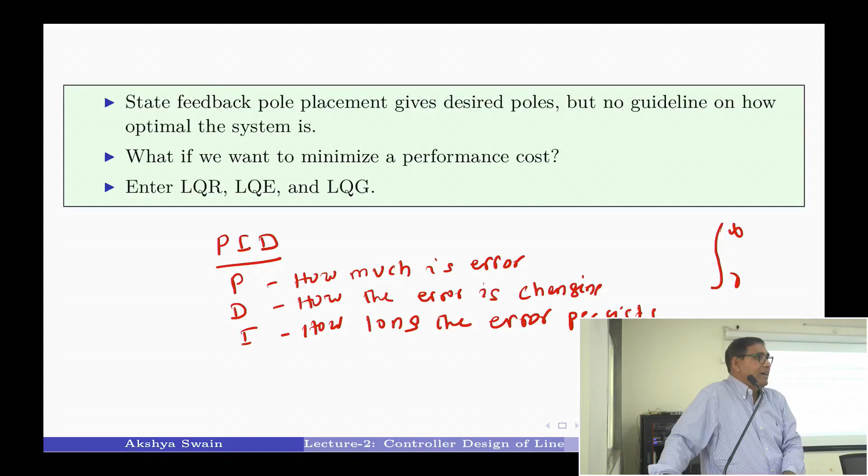So the point: proportional controller, derivative controller, and integral controller. Every house has got an integral controller always. And you will see, although the integral controller has got this bad quality, it is very useful. That is the only controller which can correct you, it can correct the steady state error. Because of the ladies, the house runs smoothly. So integral controller seems useless when talking in a social sense, but actually it's very useful. Ladies are useful, otherwise there will be house imbalance.